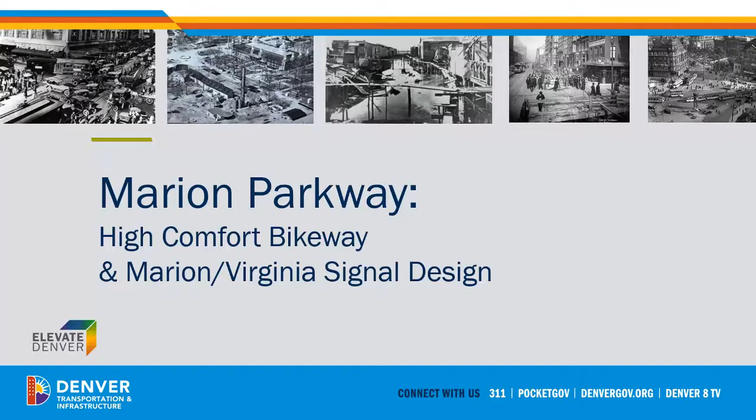And with that, I will pass it over to Ashley, who will be talking about the Marion Bikeway. Great, all right, thank you, Gabby. Good evening, everyone. As Gabby said, we really appreciate you all taking time out of your evening.

I know it's a lovely night tonight. I'm Ashley Grace.

I'm here to discuss the Marion Parkway High Comfort Bikeway project and a project that emerged from that effort, which is a signal design for Marion Parkway and Virginia Avenue. I imagine I've met many of you during the outreach we conducted last year with the Bikeway project, but for those I haven't met, hello, and let's jump right in.

First off, I'm going to present a few slides that may be familiar to a number of folks, but the intent is to ensure everyone has a little background on the bike project, especially those who weren't part of the numerous meetings we had last year. This is a very abbreviated version, so we have more information online about the bike project.

This slide provides context on the location of the Marion Parkway High Comfort Bikeway. As you can see, this bike facility connects major regional destinations, including the Cherry Creek Trail and Washington Park. It's also considered a multimodal route to Steele Elementary and South High School by way of Wash Park. Self-reporting bicyclist data shows this route is highly utilized, nearly as much as the Cherry Creek Trail on some days. I imagine most of you are pretty familiar with this area, especially if you live, work, or commute around the Wash Park area.

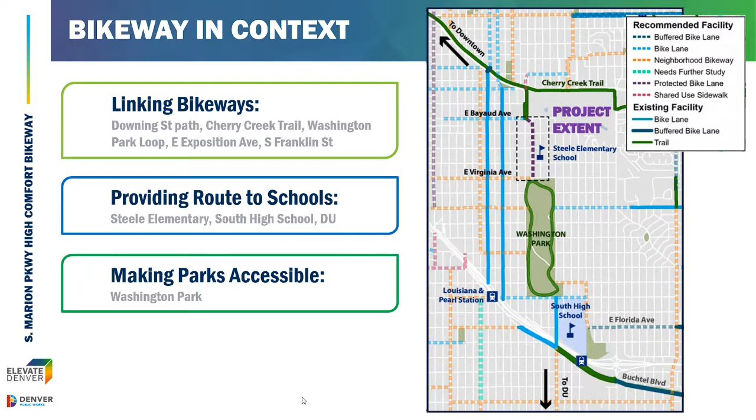A question we received from several folks during the design process was, why are you adding a protected bike lane to Marion Parkway when we already have a striped bike lane? It's a great question. As Denver seeks to build out its bicycle network across the city, we're not only aiming to increase bike facility miles, but also working to improve safety and quality of facilities, especially major connectors like Marion. The reason is that currently the majority of cyclists on the roadway today are what we consider highly confident or at least somewhat confident cyclists, meaning folks already comfortable with what we have on the road, those striped bike lanes, shared roads with no traffic mitigation, etc.

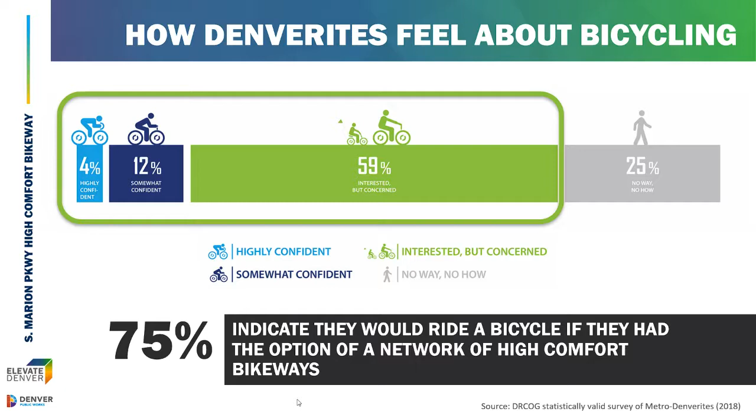However, Denver has numerous goals related to our bike network, including making it safer, more accessible, and more comfortable for all users. A recent study conducted by Denver Regional Council of Governments, DRCOG, indicated that nearly 59% of the population would bike more if they felt safer and more comfortable. Those are facilities more comfortable than what we typically have on the road today, often used by people with children or those less confident on the roadway. Building safer facilities like we're planning on Marion Bikeway helps us build for that 59%, which helps us get to about 75% of folks feeling comfortable enough to ride on bike facilities in Denver.

Another question we receive is, what is a high comfort bikeway? What is a protected bikeway? This slide illustrates some of the main design features we aim to achieve when designing a high comfort bikeway. Every bikeway is slightly different depending on context, but we're really designing to reduce or eliminate dooring issues, reduce or eliminate parking and loading conflicts, reduce conflicts with turning vehicles, and most importantly, provide space for different roadway users and speeds, which reduces stress for all roadway users.

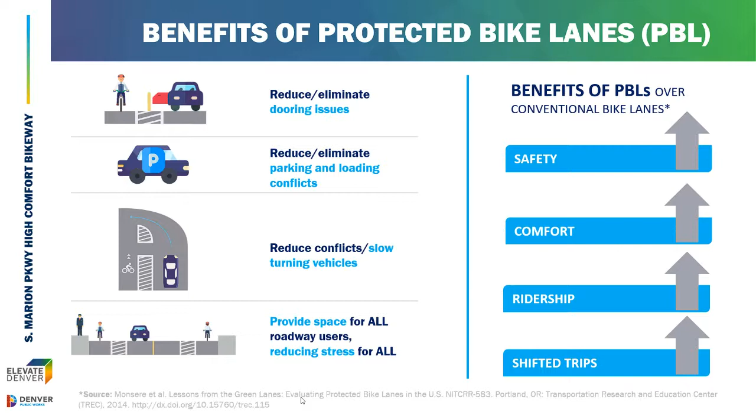All of these things lead to many benefits that align strongly with Denver's Vision Zero action plan, as well as the Mayor's Mobility Action Plan, including safety, comfort, increased ridership, and shifted trips from vehicles to bikes.

This timeline, again a very abbreviated version, is meant to demonstrate this bikeway project has been in the works for a while. What it doesn't show is that prior to 2019, this upgrade was identified in Denver Moves Bikes, and also in Blueprint Denver. It was included in the Elevate Denver Bond funding package, approved by voters in 2017. In 2019 we actually began the official outreach and design process. We had our first public meeting last May, I believe, came back and met with a stakeholder group in June, and then came back in November where we presented a near final design.

Since we met in November, we've been busy incorporating everything we heard at that last meeting and throughout the design process, working on finalizing the design documents into what we call a construction bid package, so we can bundle that with other Elevate Bond projects and move towards procurement and eventually construction.

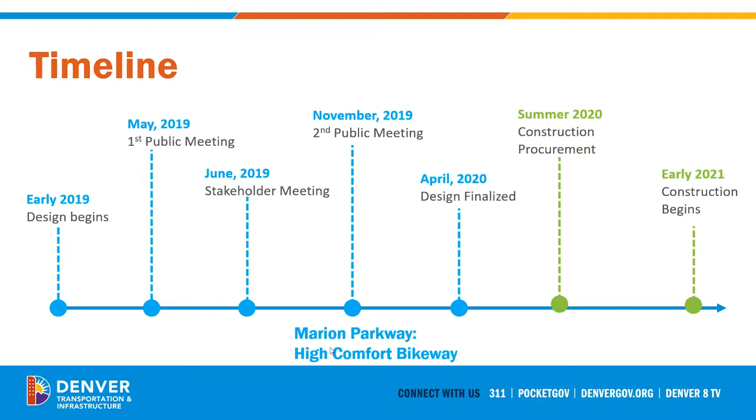So what are we building? This next slide is probably familiar to many of you who know the project. We presented this cross section at the November meeting. On the top left is the existing cross section with a parking lane, bike lane, and travel lane.

The bottom left shows what the future Marion Parkway will look like. On the outside we have a parking lane, then a travel lane, then a buffer between the travel lane and the bike lane. We're able to gain that buffer because we've narrowed the parking and travel lanes just a little bit.

An important contextual element we took into consideration is that Marion Parkway is a designated historic parkway. As a result, we worked hard with the Parks and Recreation team and through our design to minimize our use of bollards. We heard very loud and clear that folks are not fans of those bollards. There will still be bollards placed primarily at corners where they're needed most for safety, especially during snow events, to signal a vertical element. The vertical element we're moving forward with, to keep with the aesthetics of Marion Parkway, is a low concrete curb.

You can also see that in this design we've moved the bikeway adjacent to the median. This helps eliminate conflicts with the parking and loading zones, among other things.

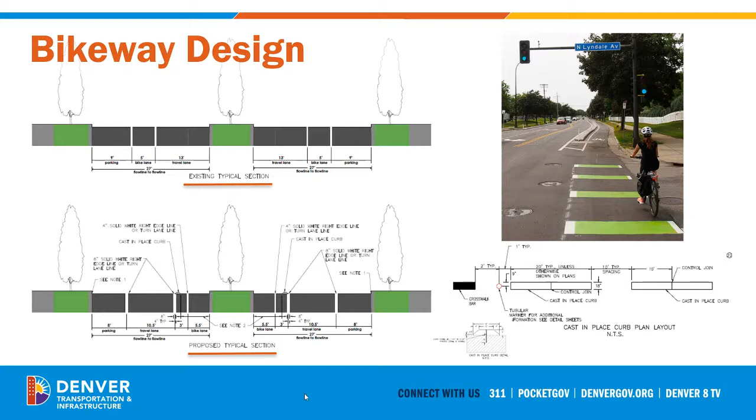So the next couple slides talk about the improvements we've made since last November. Let's start with the two minor streets, Cedar and Dakota.

Before we move to the next slide, I don't have anything here for Alameda because we're not really doing much there. The reason is there are no left turns on Alameda, meaning no conflicts with the median-running bike lane, and we also don't want to encourage cyclists to turn onto Alameda.

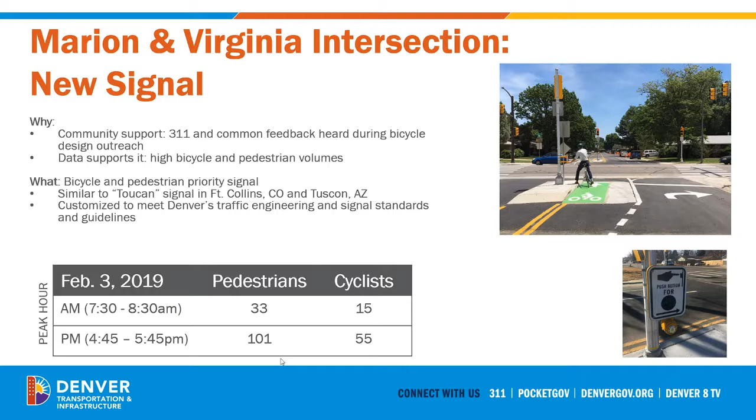And this signal design, while it's new for Denver, this is the first time we're really designing something that's both bike and pedestrian oriented. There are a lot of examples both in Fort Collins as well as Tucson, Arizona that we are using as our original templates, but again, we're modifying based on Denver, our engineering standards and guidelines, and what works in this context.

There will be one pole and a mast arm on the north side of the median that crosses Virginia. That will have signal heads that control traffic for both eastbound and westbound Virginia. We'll have a second pole and mast arm on the southwest corner that controls the southbound Marion Parkway movement. We don't have anyone leaving the park, so we don't need an additional pole and mast arm to control any northbound traffic. There will be push buttons for pedestrians on all four corners.

And then there will be push buttons for cyclists that will be located in the median adjacent to the bike facility so that folks can still stay on their bike, push the button, wait for it to activate, and then cross. We've been working closely with our partners in the Department of Parks and Recreation on this design. We're trying to strike a balance here between the safety that we need to achieve, as well as the important goals and needs of the park and the parkway.

We're also working closely with the forestry team, which is why if you look closely on the northwest corner, you see a bump out. That bump out not only shortens the crossing distance for pedestrians, but also, importantly, helps us protect the tree on the northwest corner, which we've talked to forestry about and it's very important, so we're working hard to preserve it. We're also making sure this is coordinated with the Downing-Virginia signal.

Some people, if you're paying attention, and I know it's also probably small on some people's screens, but the one thing that's important for everyone to note is the one major change: we are restricting that southbound left turn movement, meaning if you're headed down Marion Parkway south, you can no longer take a left onto Virginia. We recognize this change is inconvenient and it's going to take a long time for folks to get used to. The good news is we are making improvements at Virginia and Downing that we believe are going to make those left turns a lot easier.

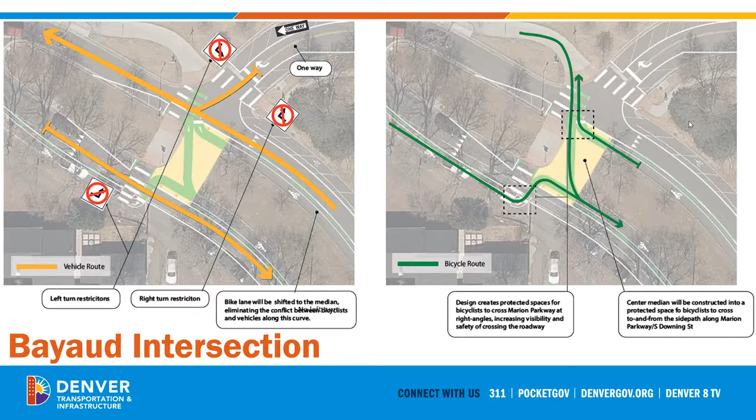Why no bump outs on the northeast corner of Marion and Virginia? Sorry, can you say that again? I'm not sure I follow. Yeah, so I guess we have not incorporated a bump out on the northeast corner of Marion and Virginia.

Well, again, the true primary reason for that bump out is the tree protection on the northwest corner. It definitely has a benefit of shortening the crossing distance there. However, bump outs can also be very expensive. And at this point, given all of the many improvements that are going in at this intersection, and the fact that it'll be signalized, we feel that the safety will be achieved. So that's kind of the primary reason there. And again, the northwest, that's a very beautiful, important tree that we want to do our best to preserve.

Another design question for Ashley or Thomas, regarding the future signal: will this be a typical red, yellow, green signal, or more like a HAWK style? It'll be a typical red, yellow, green signal with three indications for all approaches, as well as pedestrian signal indications with countdown lights. Excellent, thank you.

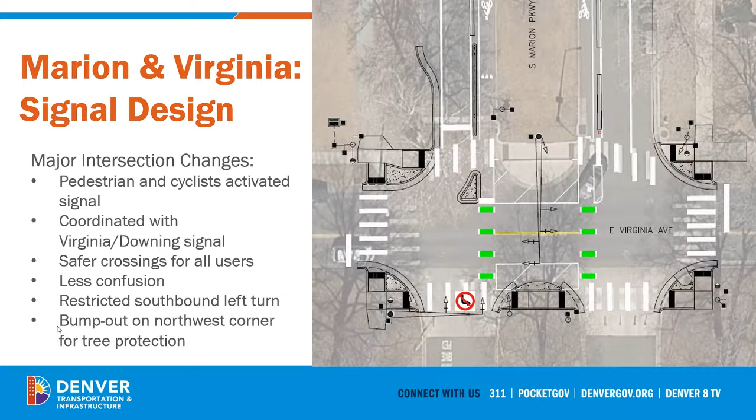The bikeway itself, once construction begins, should really only be a couple months, which is significant, I understand. But the other thing to note, that isn't on here, is there should be paving of a portion of Marion this summer. We were trying to sync up and merge our construction with the paving, but given how much this bikeway has grown in terms of all the elements we're putting into it, we weren't able to meet that deadline. So unfortunately there is going to be a little bit of paving this summer, as well as once we get into construction, a couple months for the bikeway.

Thomas, how long does a signal project like this usually last in terms of construction? For a single signal, it should only take about 1 to 2 months for construction. The design will be the majority of the timeline of the project.

Depending on how things align with funding, our goal in general in the city is to do a better job of aligning projects so that we minimize construction impact to you all in the community. We recognize that is a hardship and challenging, so we will do our best to try to sync things up when we can.

That is all the time that we have right now for this segment. We have 2 more Q&A segments coming up. The next section is going to focus on the improvements on Downing, and the following one is going to be on Alameda. At the very final Q&A, we're going to focus a little bit on Alameda, but then it's going to be open to all the other questions we were not able to address. We have some really good ones.

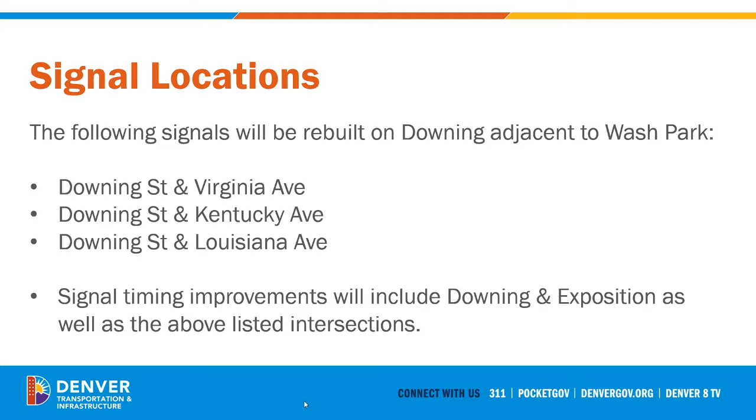Next slide please. The signal rebuild project includes upgrading pedestrian curb ramps and signal equipment to current standards. There will be signal head indication above each travel lane. This will definitely improve signal visibility and make it easier to install left turn green arrows once it's warranted.

We will update signal timing for better progression and add leading pedestrian intervals to cross Downing. This means we'll give pedestrians a couple seconds head start to cross Downing before the vehicles go, so they can establish themselves in the street. We will also update pedestrian crossing times. The signal rebuild will allow us to use reliable detection for bikes, making it safer for all road users.

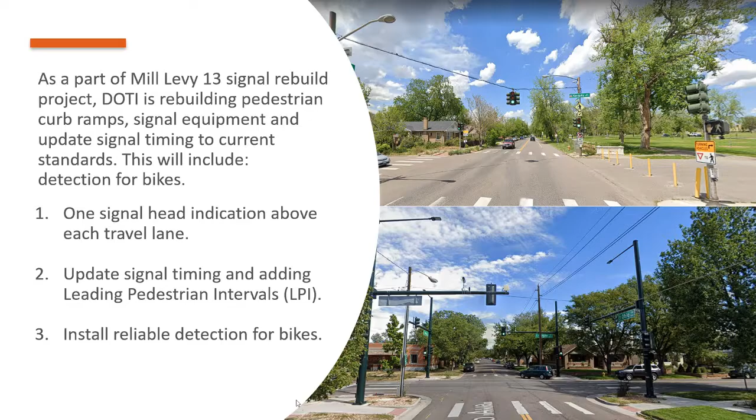Next slide please. So we're not changing the geometric layout at Downing and Virginia, but we will be rebuilding curb ramps, upgrading signal equipment, and signal timing to include leading pedestrian intervals. You will see a 3-section flashing yellow arrow on Downing over the left turn lanes. The flashing yellow arrow acts like a green ball, so left turners have to yield to oncoming traffic.

There will not be a green arrow left turn on Downing, since the majority of turning vehicles were able to clear on yield condition, and the number of turning vehicles is less than what's required to meet the warrant at this time.

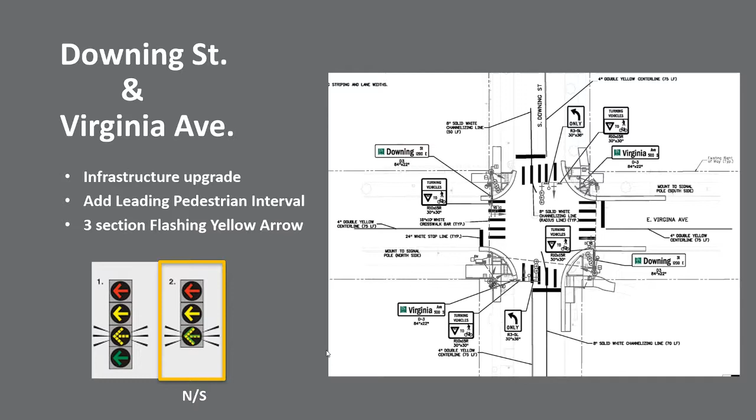Can I get the next slide please? Same with Downing and Kentucky. We will not be changing the geometric layout, but we will be upgrading the ramps, signal equipment, as well as adding leading pedestrian intervals.

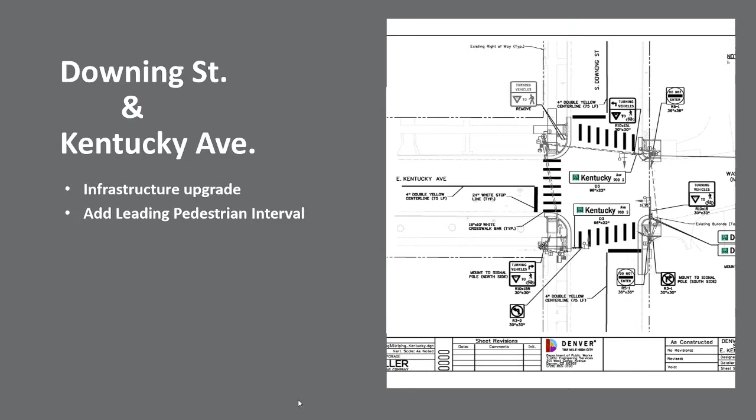The biggest change you'll see at Downing and Louisiana will be removing the free westbound right turn and providing approximately 60 feet of right turn storage at the signal. There will be a smaller curb radius at the northeast corner. These changes will eliminate the free right turn pedestrian crossing conflict and promote slower turning speed.

Next slide please. For the construction schedule, it's happening now to late fall of 2020, and the signal timing improvement will be from the fall, once the signal is constructed, to December 2020. The consultant will finalize signal timing along Downing adjacent to Wash Park, and of course the schedule might be extended depending on normalizing traffic patterns due to COVID-19.

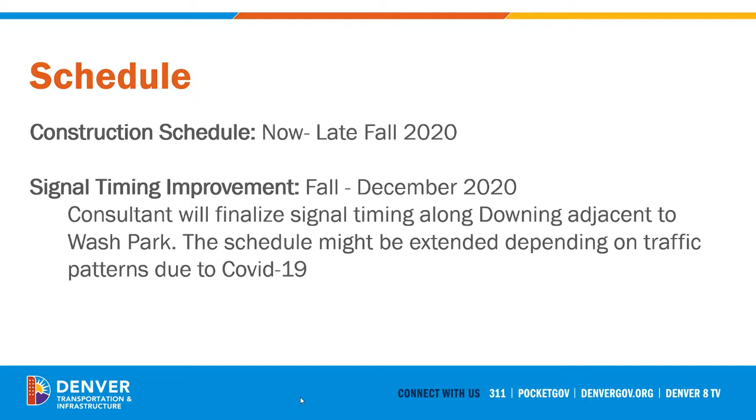Now I'll pass it to Britt Boncory to talk about Downing pedestrian crossing and speed study. Thank you, Fadia.

Again, my name is Brett Boncory. I'm with DOTI, the Transportation Design Group, and I'll be presenting on the Downing speed and pedestrian crossing study right now. As a former area engineer in this area, I was kind of leading this effort.

The goal of this study: we received quite a few 3-1-1 requests regarding speeding concerns along Downing between Speer and Louisiana, but also to improve pedestrian crossing and access into Washington Park across Downing Street. So our two goals were to look at those two things.

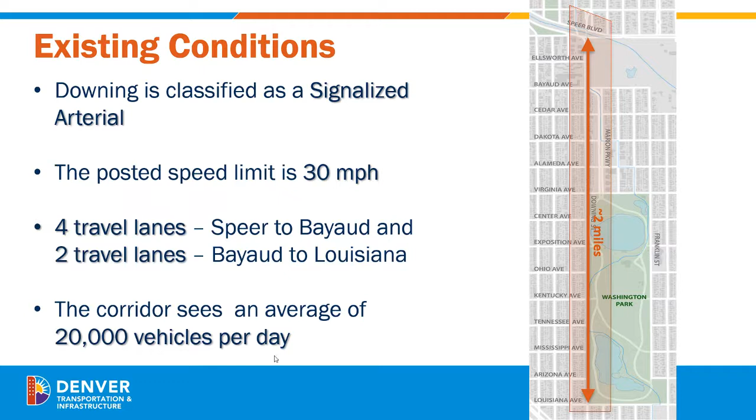As far as the project limits, what we looked at with this study was about a 2-mile corridor between Speer in the north and Louisiana in the south. Downing is classified as a signalized arterial, hence the traffic signals, with a posted speed of 30 miles an hour. We have a 4-lane cross-section, 2 lanes in each direction, north of Bayaud, and a 2-lane cross-section, 1 in each direction, south of Bayaud. This corridor sees anywhere from 16,000 to up to 20,000 vehicles per day, depending on the location you're measuring from.

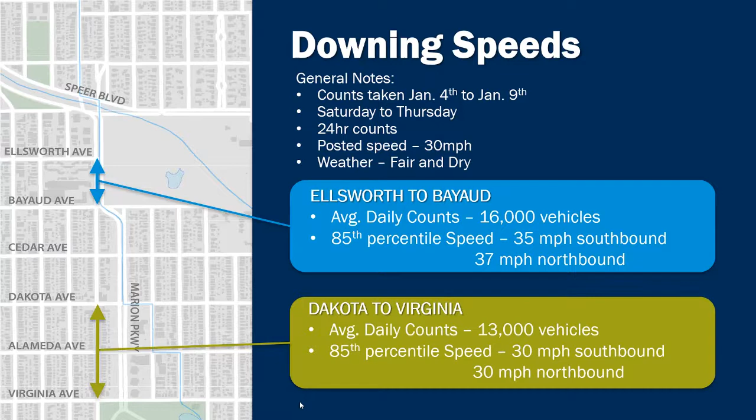In the north and south, we conducted the data collection in early January. For the northern end of the corridor, as shown on this slide, we saw speeds around 35 to 37 miles an hour from Ellsworth to Bayaud, so definitely some really high speeds here, and speeds of 30 miles an hour, which is the posted speed, from Dakota to Virginia.

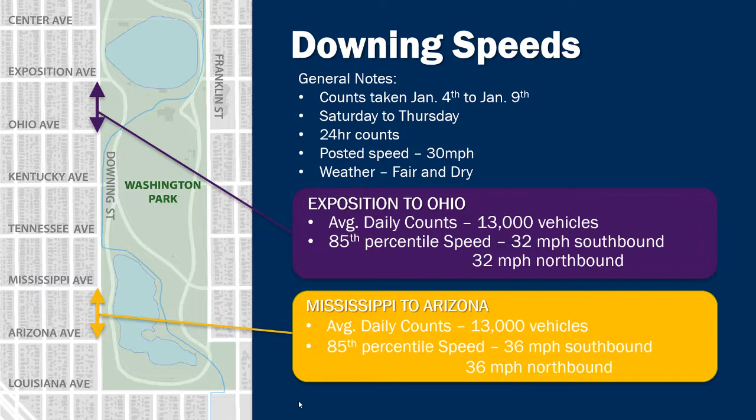If we go to the southern end of the corridor, we're seeing speeds of 32 miles an hour in both directions between Exposition and Ohio. Further south, we're seeing some higher speeds again between Mississippi and Arizona of 36 miles an hour. This data shows us where we need to pay attention as we evaluate our speed mitigation options, which I'll talk about in a second.

But one thing we saw as we started looking at this corridor is that there's a pedestrian access gap between Kentucky and Louisiana, where pedestrian crossing opportunities are more than a quarter mile apart. So that's also something we wanted to pay attention to as we considered improvements here.

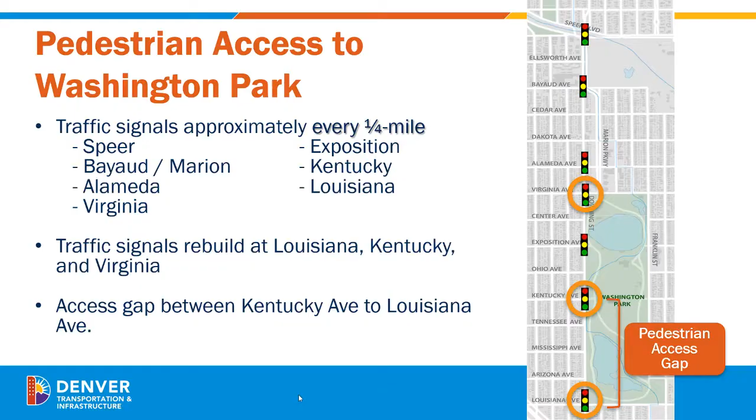As you may already know, we as engineers have to use pedestrian crossing data to help us determine if locations meet city criteria for a pedestrian crosswalk. So we collected counts at a couple locations along Wash Park: at Downing and Mississippi, which is exactly between Kentucky and Louisiana and gets us back to that quarter-mile crossing spacing, and at Downing and Ohio. Downing and Ohio might seem a little random, but this was another location where we've received a few requests for counts and pedestrian crossings, so we wanted to take a look at that during this study.

What we saw at Downing and Ohio is that we had a pretty minimal amount of pedestrian crossing happening during the highest hour of the day. But at Downing and Mississippi, we saw a much larger amount—around 23 peak hour pedestrian crossings—which meets our criteria for placing a marked crosswalk at a location like this.

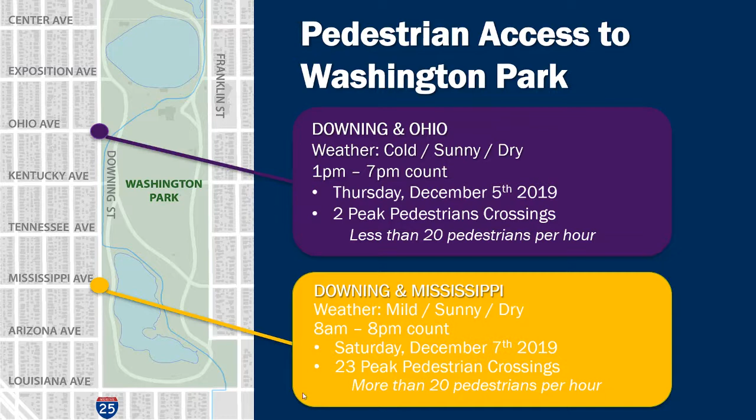Which kind of brings us to our recommendations, just to keep this short and sweet. So these are the recommendations, starting with the northern half of the corridor. At Speer and Downing, some of the speeds along the corridor in this area begin right at Speer, where we have a double right turn lane. This not only allows for faster speeds around this turn, but it also makes it difficult for pedestrians to cross on green. So we plan to remove that second right turn lane to increase pedestrian safety there.

From Speer to Bayaud, we're proposing to rebalance some of these lane widths. As you might know, the lanes are pretty wide, so we're going to do some restriping to encourage slower speeds.

At Ellsworth and Downing, we're going to study the potential for a marked crosswalk and rapid flashing beacon here. For this, we'll need to conduct counts. This was an improvement that came up somewhat late in our study after COVID-19 was a thing, so we haven't been able to do our regular data collection as we would.

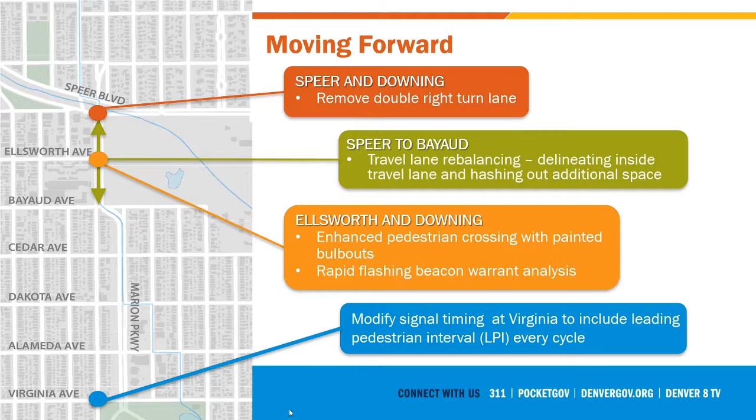At Virginia, as Fadia mentioned, we'll be modifying the signal timing to include a leading pedestrian interval every cycle to allow pedestrians to get out in front of those right-turning vehicles before they go. For the southern end of the corridor, around Washington Park, we'll be modifying signal timing at Exposition, Kentucky, and Louisiana to include the LPIs, leading pedestrian intervals.

At Downing and Mississippi, this is where we had that high pedestrian crossing volume. We'll install new marked crosswalks with pedestrian refuge and flashing beacon here. We have Parks and Rec on the call, and we're coordinating with them on adding a ramp on the park side, connecting to the Washington Park path, and also connecting to provide better access to that RTD transit stop on the east side of Downing.

Further south along the corridor, in order to mitigate some of the high speeds we're seeing, we're also looking to implement some traffic calming in the form of spot medians with paint and post, between Mississippi and Arizona.

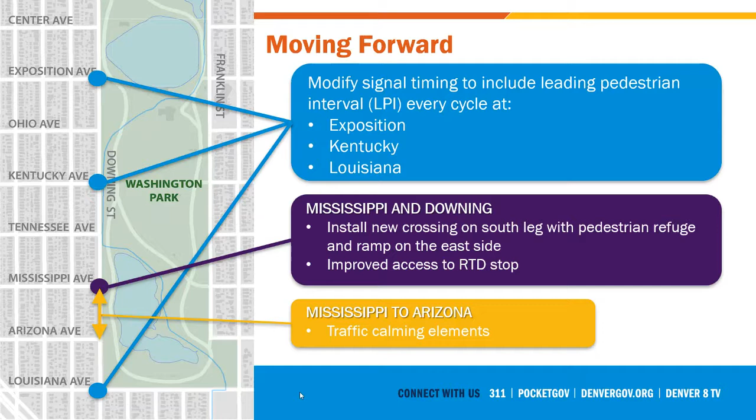As far as schedule timeline, we'll be designing these improvements shortly after this meeting, through summer 2020, probably through fall 2020, and hope to implement these improvements sometime between fall 2020 and spring 2021. So that's my presentation. Thank you all for being here again.

I think you're on mute, Gabby. Mute. Yes, I'm on mute. Sorry, everybody. So we're back.

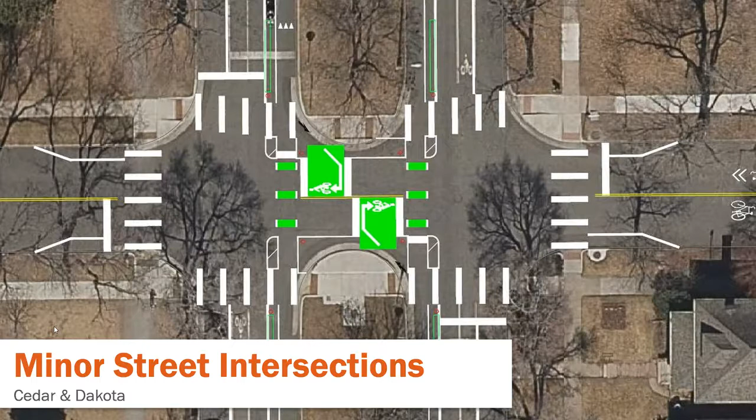Fadia, we have a question concerned that the right turn changes on Downing and Louisiana could cause cut-through traffic onto Arizona. Has this been studied? No, it has not been studied because I am missing how the right turn from westbound Louisiana into Downing will increase the cut-through traffic.

I think there might be a misunderstanding. This is Brett again. We're actually not taking away a right turn lane. Is that correct, Fadia, going west? Correct. We're actually providing more storage for the right turn, because before it was a free right turn without enough stacking, so barely a car could turn right. But now we're providing 60 feet of storage for them, so more right turners can go at the intersection. We're not eliminating travel lanes, we're actually providing more storage for the westbound right turn.

I also want to explain that this is a signal reconstruction project with some geometric changes. Down the road, if there are more concerns, we can look into 311 or PocketGov, and the area engineer will do further study and analysis for traffic-related concerns.

Fadia, another question for you related to traffic concerns. There was recently a serious cyclist injury at Louisiana and Downing. How will this new traffic signal rebuild make this intersection safer for bikes? Will the new intersection allow for a bike lane on Louisiana rather than sharrows as specified in the Denver Moves plans? At this time, this intersection is just improving the westbound right turn, providing storage, but in general, with better detection for bikes, we'll pick them up and give them enough time to cross. The bike lane on Louisiana may be a different project that's coming, and with the signal rebuild there is the possibility and ability to add a bike signal if needed. So that's how we'll help bicyclists at that intersection.

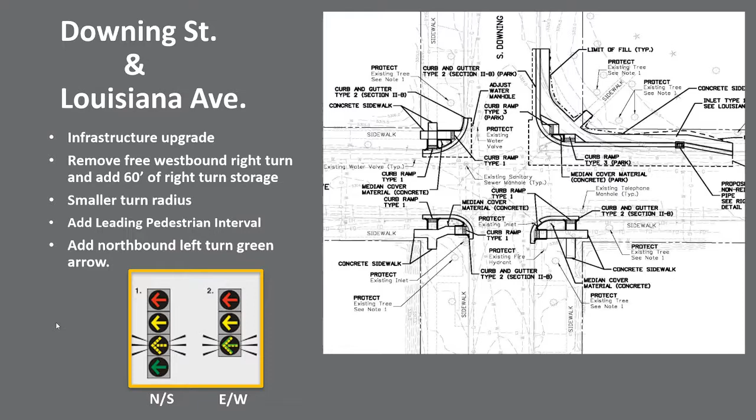I'm not sure if you guys notice, if you go out now, you'll see that curb beaten by cars going over it. So it's not like we increase the crossing distance or the crossing time needed for pedestrians, but it will help a little bit with the bus turning.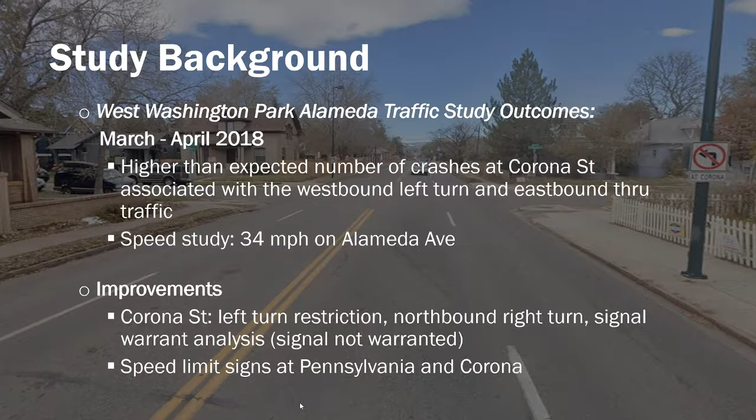Back in 2018 we conducted the West Washington Park Alameda Traffic Study. As a result, we saw a higher than expected number of crashes at Corona Street, associated with 90-degree angle crashes occurring between westbound left turns and eastbound through movements at that location. This study also uncovered decently high speeds along Alameda. Since a signal was not warranted at Corona Street, which we looked into, we restricted left turns to mitigate that crash picture. We also added speed limit signs as a first step towards mitigating high speeds along Alameda at Pennsylvania and Corona Streets.

With this after study, we wanted to look at the impacts of that left turn restriction at Corona. We've heard from residents about cut-through traffic this might have caused, specifically on Ogden and Clarkson to the north and south of Alameda. We also wanted to zoom out and look at more holistic potential safety solutions along Alameda Avenue to further mitigate speeding and some crossing issues we're seeing at Franklin and Alameda.

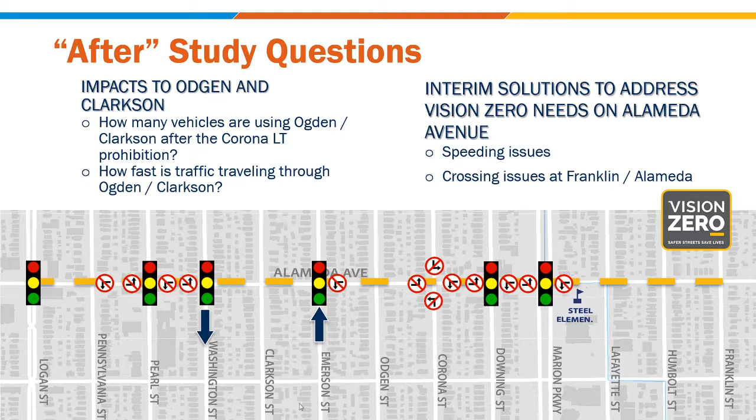As far as existing conditions on the corridor, Alameda is also a signalized corridor, just like Downing, with a posted speed limit of 30 miles an hour. We have 4 lanes - 2 in each direction west of Franklin - and 2 travel lanes, one in each direction, east of Franklin. This corridor sees an average of 15 to 19,000 vehicles per day depending on location. There are a few left turn restrictions along the way: one at Pearl in both directions, at Corona in all directions, and at Downing and Marion.

We wanted to drill down into per-direction volume as we look at more holistic solutions on Alameda. We see a broad range, anywhere from 3,800 to 10,500 vehicles per day per direction, depending on location. The segments exhibiting those 10,000 vehicles per day per direction are typically in the realm of what we'd consider one travel lane able to handle - something to note as we move through this presentation. These are the speeds called out in that study along Alameda, up to 34 miles an hour, while posted at 30 miles an hour.

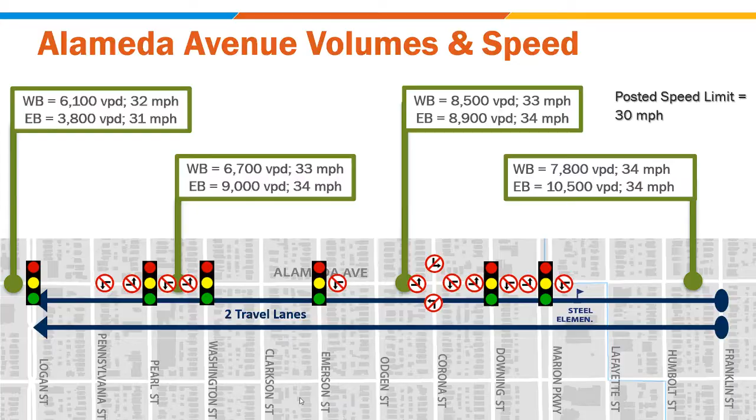The aha moment here is that these volumes and speeds are comfortably within the realm of what we at the city would expect for a local neighborhood street.

Same thing goes for Ogden. We see between 450 and 662 vehicles per day here, with speeds between 20 and 24 miles an hour. These speeds, just like Clarkson, are well within the realm of what we'd expect for a local neighborhood street.

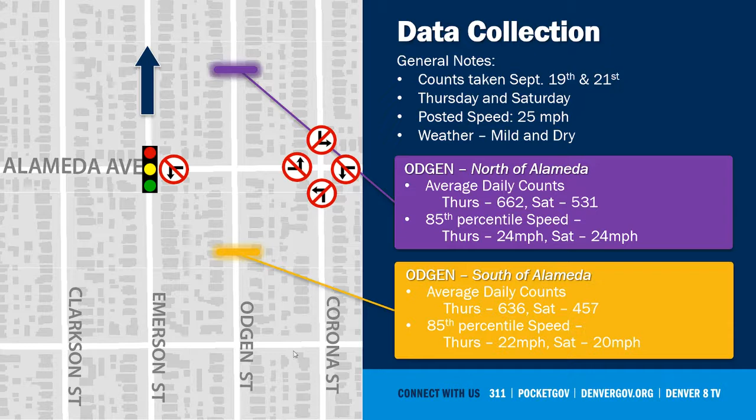Moving toward Franklin and Alameda, we wanted to take a deeper dive into this intersection, which has been the subject of many resident concerns, specifically related to crossing as a vehicle or pedestrian. A previous study found that in February 2019, we looked at installing a traffic signal here to help with that crossing, and found that we have a developing crash pattern.

We saw 5 correctable crashes in a 12-month period. Those were right angle crashes that could be mitigated. But when we look at the volumes entering this intersection, they don't meet the criteria for a signal or a pedestrian crosswalk. Still, with that crash pattern of 5 crashes in 12 months, that raises some flags for us and tells us there's a safety issue here we want to look into mitigating.

Next slide. Going back a bit to the Corona Street diversion topic and the related safety impacts of that diversion, we collected and analyzed crash data before and after, and came up with an annual rate to compare how these intersections are operating after that restriction.

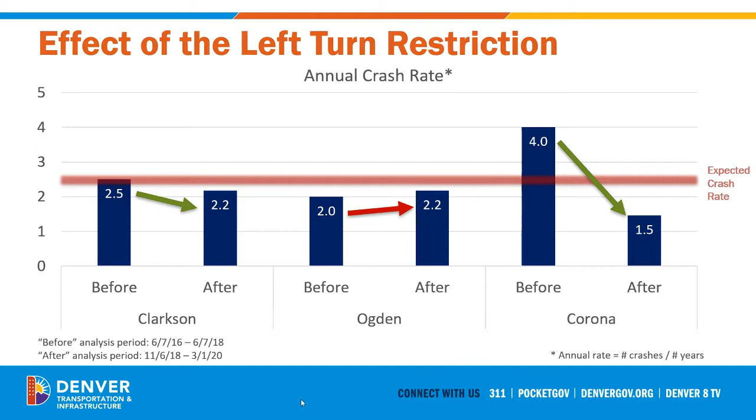Now moving forward with that data and analysis, we're recommending some next steps along this corridor. Considering that westbound volumes on Alameda are somewhat low, and considering the speed and safety issues at the unsignalized intersections, we're recommending removal of a westbound travel lane, with the exception of at Downing and Marion, to make sure traffic gets through those busy intersections.

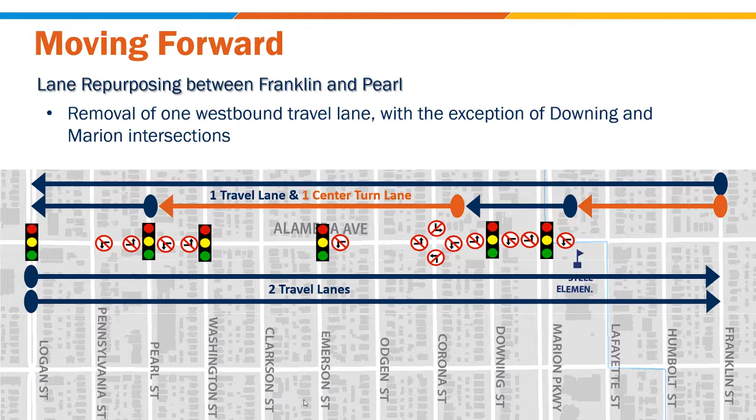What this does is introduce a two-way left turn lane, which will help eastbound and westbound left turners avoid the pressure we all feel on Alameda when trying to take a left, which forces us to accept gaps we wouldn't take if we had time. This turn lane would allow drivers to accept appropriate gaps before proceeding with that left turn movement, hopefully making this condition safer.

This lane repurposing would also allow us to reinforce the left turn restriction at Corona Street mentioned earlier, with striping, and the red circles are flexible delineators in this concept, meant to slow down traffic along Alameda and allow pedestrians to complete their crossing in two stages.

One thing I'll say to set expectations: most everything in this picture is what a spot median would look like, with the exception that we're not using that thermoplastic paint. What we've seen around the city is that it doesn't necessarily meet the benefit-to-cost ratio we want. We think just the bollards and the paint give us basically the same safety benefits without adding that thermoplastic paint in the middle of the median.

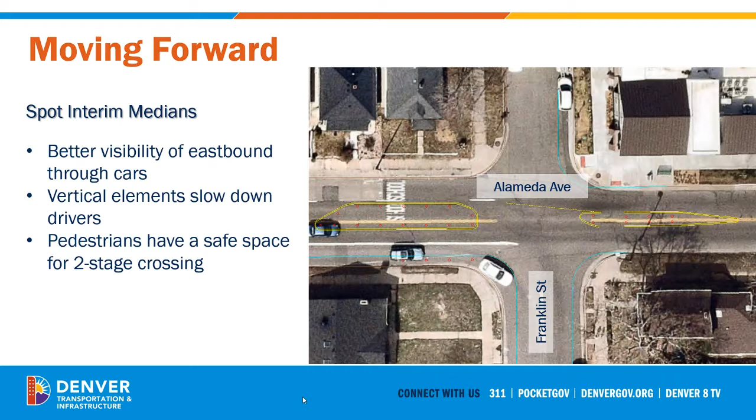So as far as timeline for these improvements, we plan to design these improvements starting this summer through the fall, and implementation would be later, likely beginning in spring 2021. But again, still considering the comments that Ashley and Gabby had about our budget with COVID and things like that, it's kind of to be determined. But our plan at this point would be spring 2021 to start implementation of those. So thanks again.

I'm unmuted. Sorry. Thank you. So quick question, Brad.

So all the data that you collected for both of these, Downing and Alameda, these were prior to COVID, correct? We have a note saying prior to the COVID stay-at-home order, there was constant and consistent violations at westbound Alameda traffic at Marion. That is correct, Gabby. Yep, all the data collected here was before COVID-19. As you can imagine, our city traffic engineer has asked us to take a pause on data collection, since the traffic numbers aren't being normal. So yeah, this is before COVID.

So we also have, Brad, several questions about speed reductions. A lot of people are wondering how we can go about reducing the overall speeds. Tinley says her 9-year-old son is here with her right now, and he wants to know how we can get speeds down from 34 miles per hour to 20.

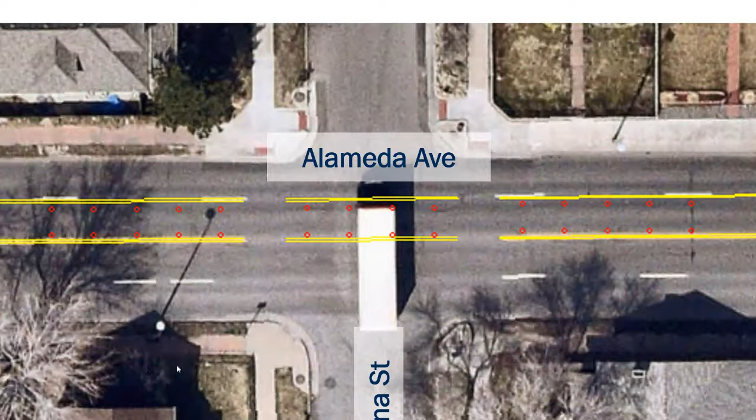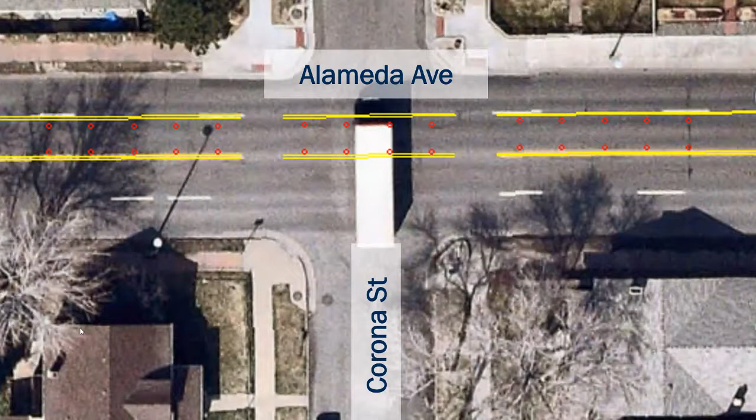Oh, so we're actually not restricting. We're implementing a left turn lane at Ogden and Clarkson, a two-way left turn lane. We're keeping the Corona left turn restriction, and in fact we're reinforcing that so folks do not disobey it, using vertical posts. To answer your question on how we're trying to make Ogden safer, it's the fact that now you have a left turn lane to wait in. A lot of the time on these 4-lane roads where we allow left turns, people waiting in that inside lane trying to take a left feel pressure from cars traveling fast behind them, and they tend to accept gaps that aren't as acceptable, because you feel that pressure. That left turn lane has proven to help with that conflict and make things a little safer. Does that answer your question?

So the increased traffic we're feeling on Ogden will remain? The increased traffic, yeah, it will likely remain at the same volume it is. What we saw was about twofold since a couple years ago before the no left turn. I understand, and that's one reason we wanted to look at it. Okay, it probably did increase, we acknowledge that, but to what extent did it increase that we actually need to do something about it? Again, it is in the local road range of volumes that we would expect.

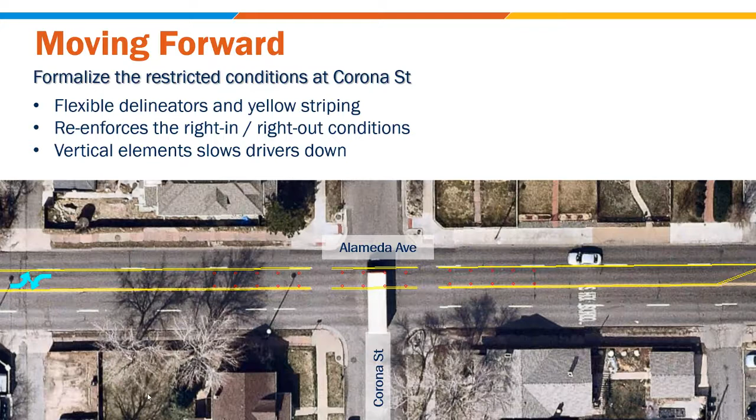Because when you have this much traffic crossing through there, we need to have a place for people to be in a safe condition in order to take that left—much like the reason we're putting the two-way left turn lanes throughout the rest of the corridor. In order to do that, we would have needed to take away a westbound lane.

And like I mentioned previously, when we did that, from our analysis it seemed similar to what happened before. It predicted it would be similar to what happened a while ago when we did the eastbound lane reduction at Downing, where traffic really backed up through multiple blocks and created an even less safe condition than we have now.

I'm with you. That's why we originally thought this lane reduction was going to be even more great, because we thought we were going to be able to do left turns at Downing. But after doing the analysis, we realized the reality could be something worse than what we have now, so we decided against that for now. We'll continue to monitor it into the future, and there could be potential for reintroducing that.

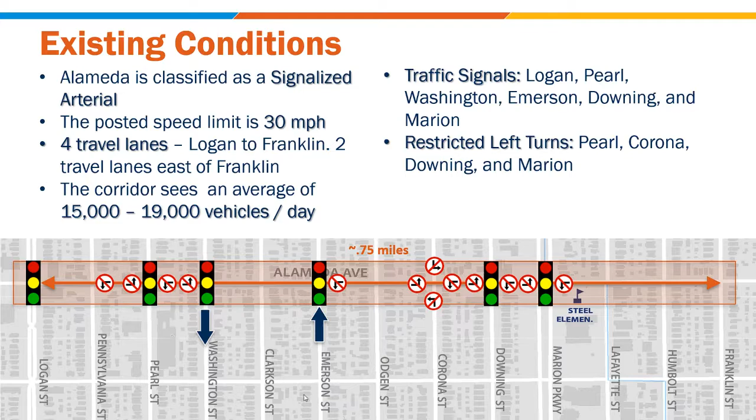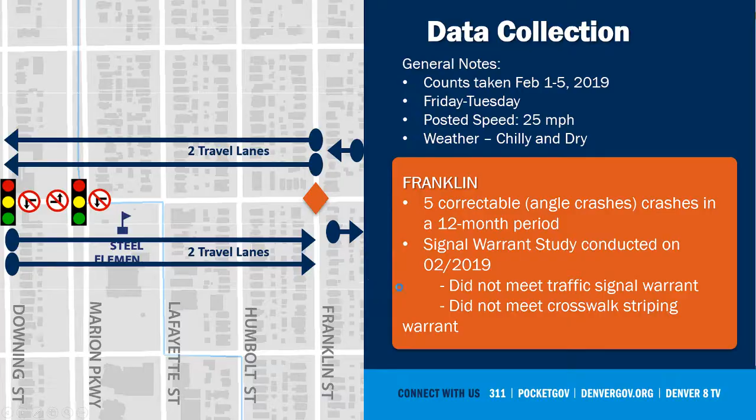So actually, Jonathan, if you could go down a few slides to the one showing where we're doing the lane reduction. Keep going. The lane reduction would include right around Franklin, pulling that one lane westbound condition all the way from Franklin to just before you hit Marion. But again, the reasons why we can't add or take away that westbound left turn lane or travel lane are as I've already stated, and we have to continue that at Marion too. So you'd have that lane reduction from Franklin, where it's currently one lane coming into the intersection, all the way to almost Marion.

I think we have a chance for probably one more question for Brett. To reduce additional left turn traffic on Ogden—would it be possible to reduce left turn traffic to residents and businesses only, to mitigate additional volume and traffic, not for cut-through traffic? Good question, one we get somewhat frequently. As a city, with those being public roads, we have not been in the practice of reducing that unless we see large freight trucks trying to go through a local road, in which case we might encourage freight truck routing. But since these are public city streets utilizing this street grid, this urban fabric, we haven't been in the practice of doing so. I think we would probably keep it open to both, unless we saw a really high percentage of cut-through traffic above our general standards for local traffic.